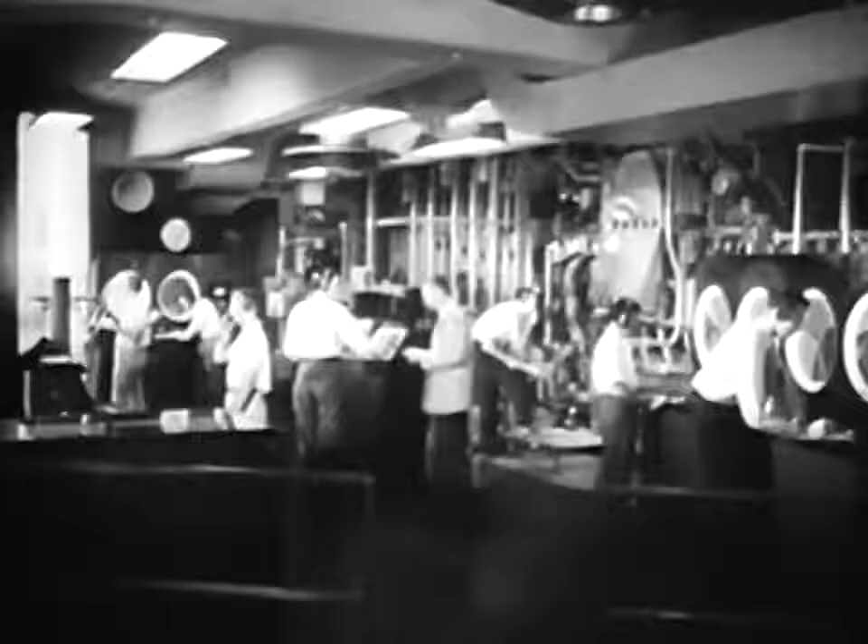Ballistics is an increasingly important and complex science that deals with the technical problems involved in hitting a given target in the field and getting the desired tactical results.

Sometimes the ammunition we need to do a particular job can be carried to the target or placed in the target's path. Sometimes it can be dropped on the target. But in most cases, it has to be fired or propelled.

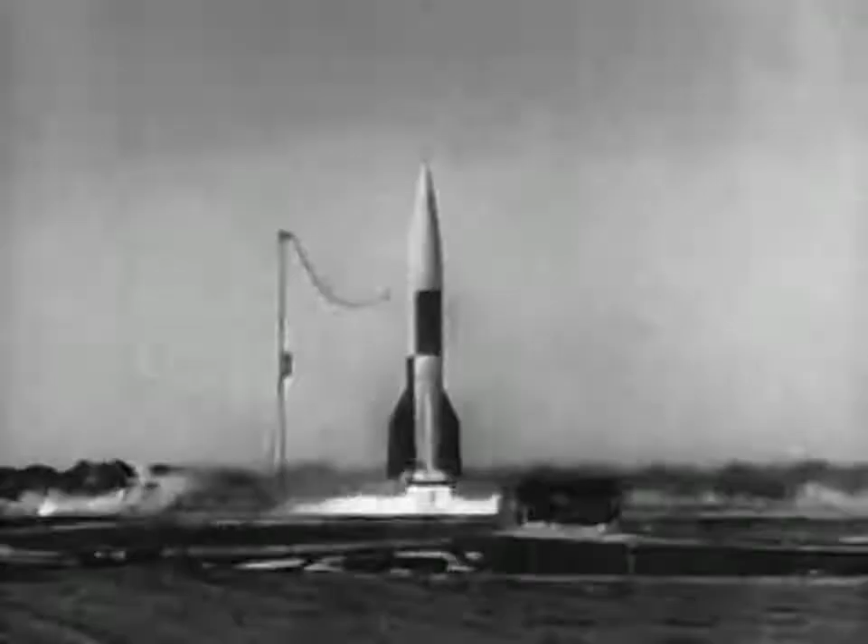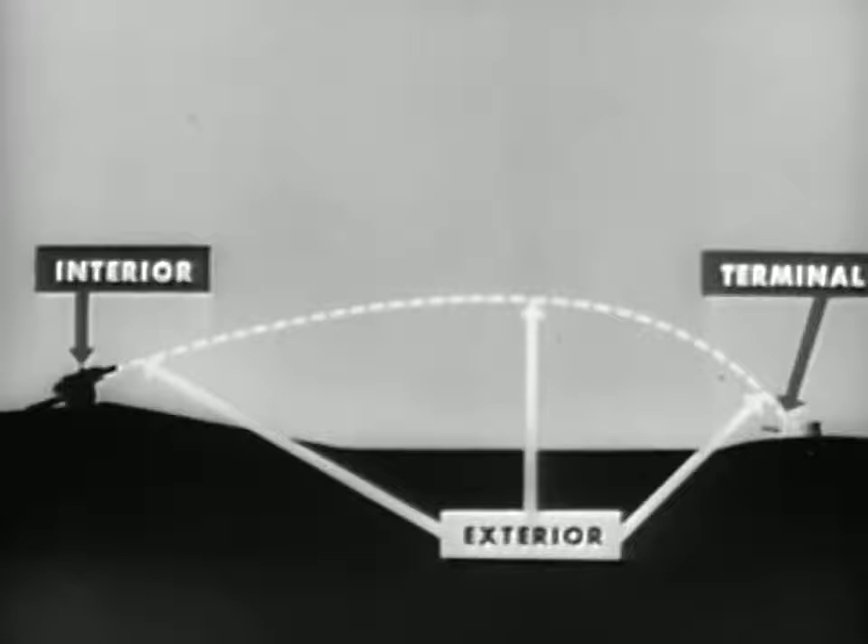This involves the solution of three different kinds of problems, covered by three closely related divisions of ballistics. Interior ballistics is concerned with the launching of the ammunition. Exterior ballistics is concerned with its behavior in flight. And terminal ballistics deals with the action of the ammunition at the target.

Let's look first at the problems involved in launching our ammunition with launching devices that are complex, precision-made instruments, but which operate on a principle as simple as that employed in a pea shooter. When the pressure behind the projectile becomes strong enough, the projectile will move.

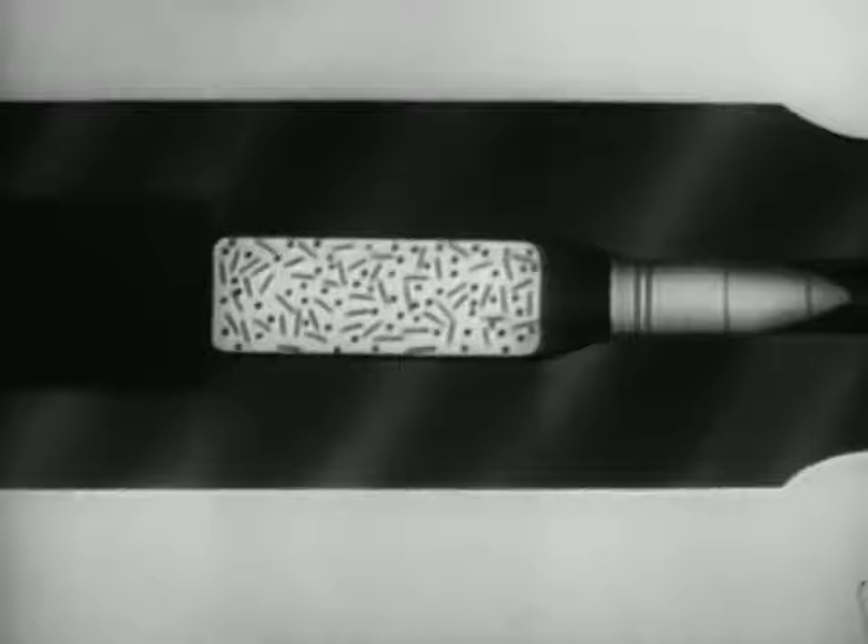In any gun, howitzer, mortar, or small arms weapon, the pressure behind the projectile is caused by the burning of the propelling charge or propellant, which forms a tremendous amount of gas in the chamber. This pressure is measured in thousands of pounds per square inch and is exerted equally on all surrounding surfaces, but with different results.

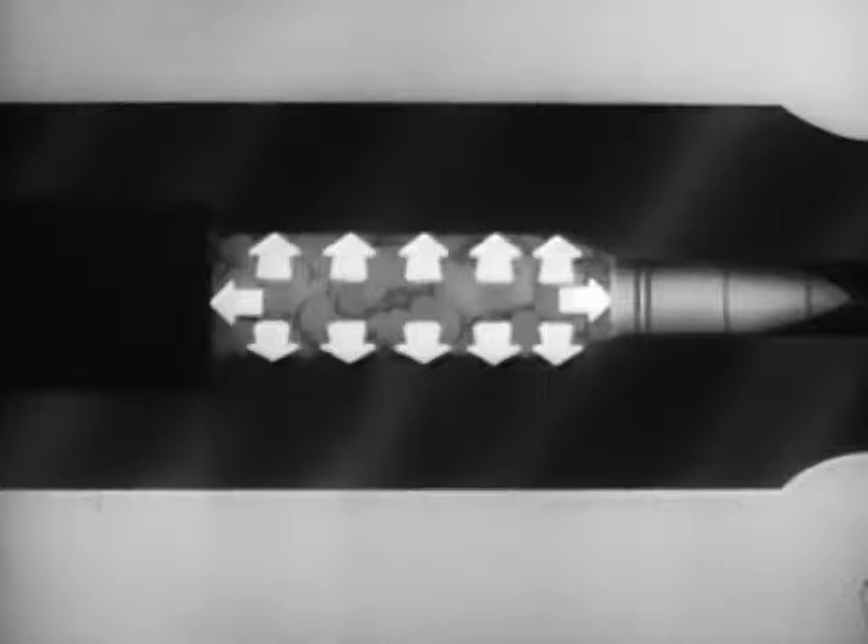The forces represented by the vertical arrows have no effect on the projectile. The pressure or force to the right is against the projectile, the most readily movable of the surrounding surfaces, and sends it out of the bore. At the same time, the force to the left is against the gun, which moves in recoil.

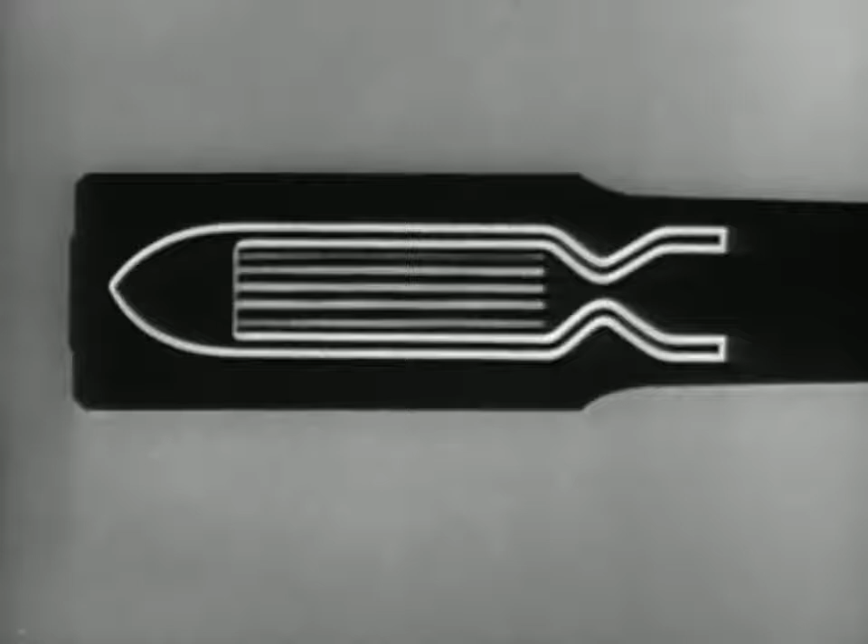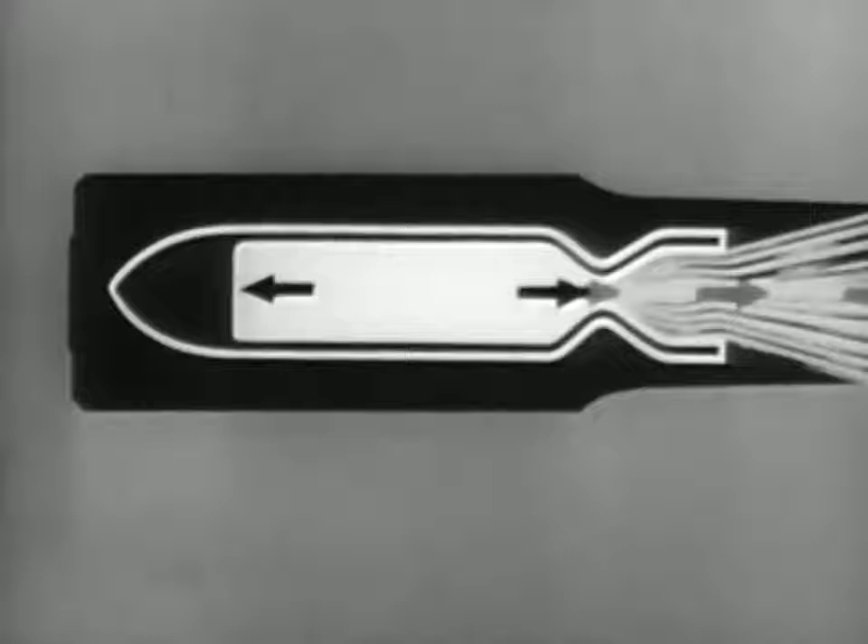By making a few changes in our simplified gun, we can see what happens when we launch a rocket. In effect, the lightweight rocket replaces the gun, and the lightweight gas replaces the projectile. The pressure inside, being equal in all directions, forces the gas out of the chamber at an extremely high velocity. At the same time, the pressure exerts an equal force to the left to propel the rocket.

Military rockets operate on exactly the same principle as the 4th of July variety. The bazooka also uses the rocket principle, while the recoilless rifle is a combination gun and rocket.

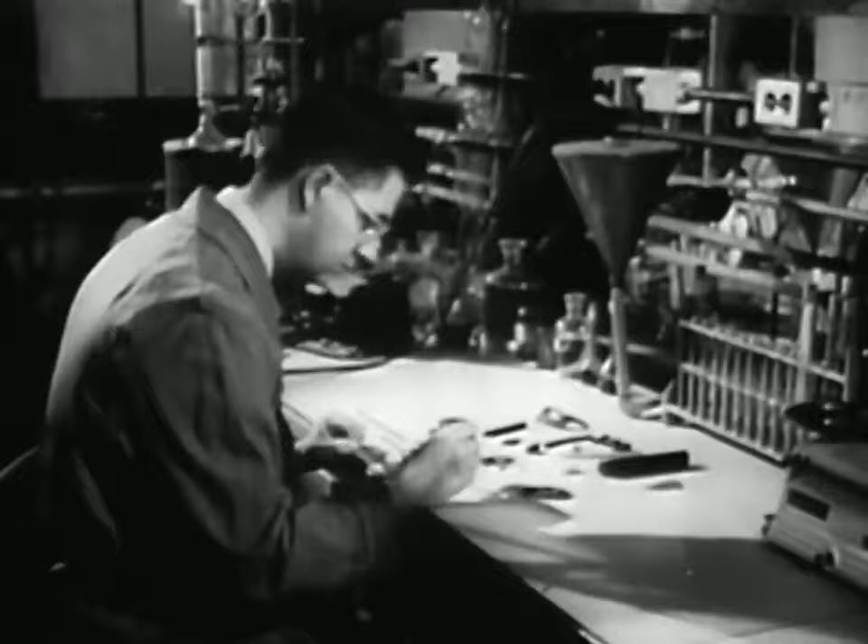The propellant used in guns and most rockets is some form of nitrocellulose, commonly called powder. Modern powder is made in grains, the grains taking many different forms to get the various pressures needed in the many different modern weapons.

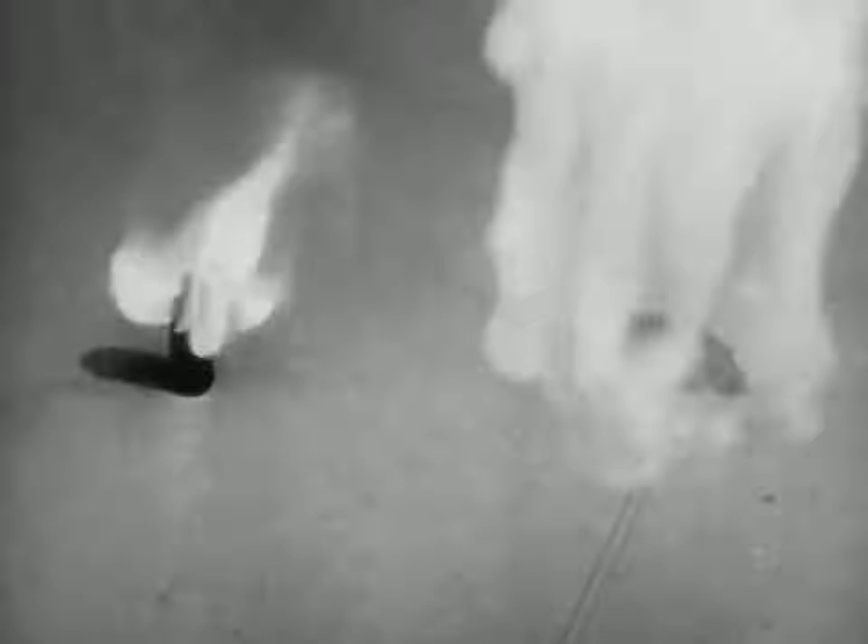Apart from chemical composition, grain size is the most important single factor in determining how rapidly a powder charge will burn. Just as wood shavings will burn more rapidly than the same weight of logs because there's more burning surface exposed, so will small grains burn more rapidly than a large grain of the same weight.

When small, rapidly burning grains are used, the propelling effect is that of a sharp, sudden thrust. The effect we get from large grains is that of a sustained push.

But grain design also affects the rate of burning. In general, there are three types of grain: a large grain with 7 holes, a medium-sized grain with 1 hole, and a small solid grain called a degressive grain.

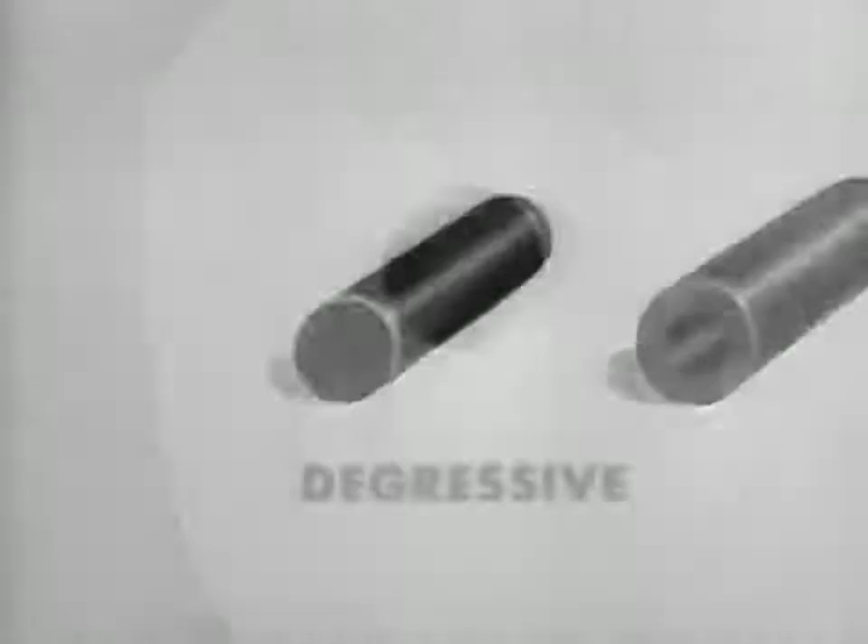When ignited inside a gun, it burns fast and the pressure rises rapidly. As the burning surface decreases, pressure is generated at a slower rate.

Here's a graph to show pressure action during burning. The degressive grain produces a very high pressure quickly, but the movement of the projectile tends to let the pressure drop off rapidly. The medium-sized grain with a single hole is called a neutral grain.

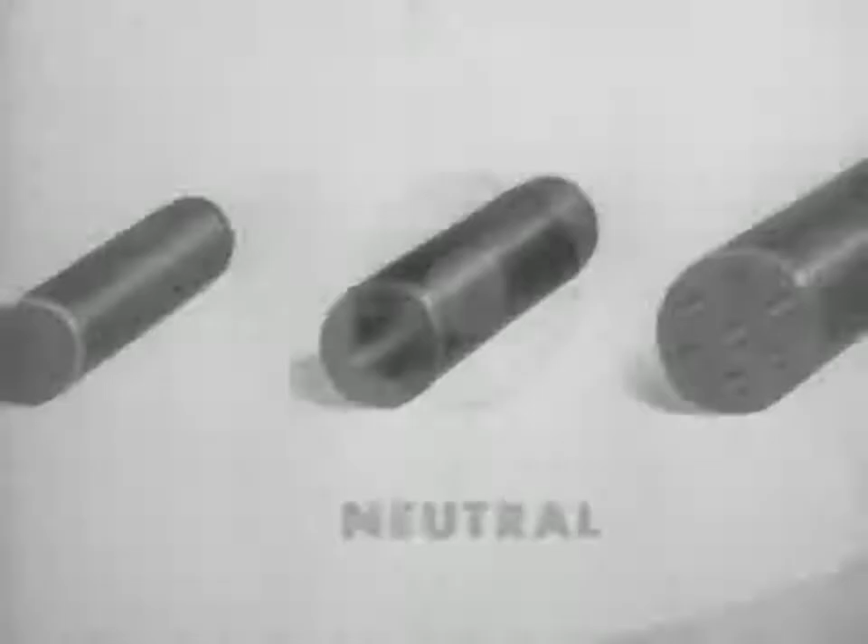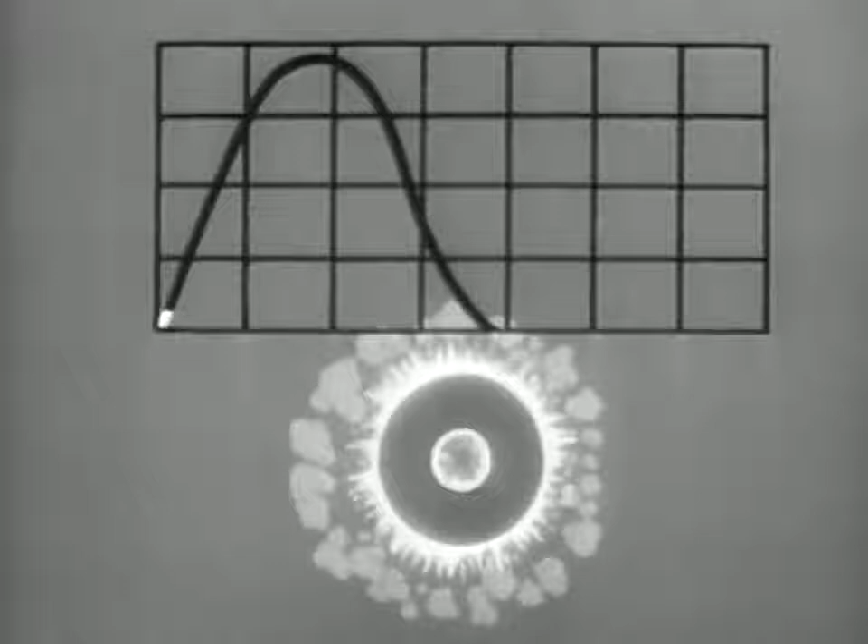In this form of grain, the burning is slower at first, but the burning surface remains constant during the burning period. Thus, the maximum pressure is not as high as with the degressive type, nor does the pressure drop off as sharply when the projectile moves.

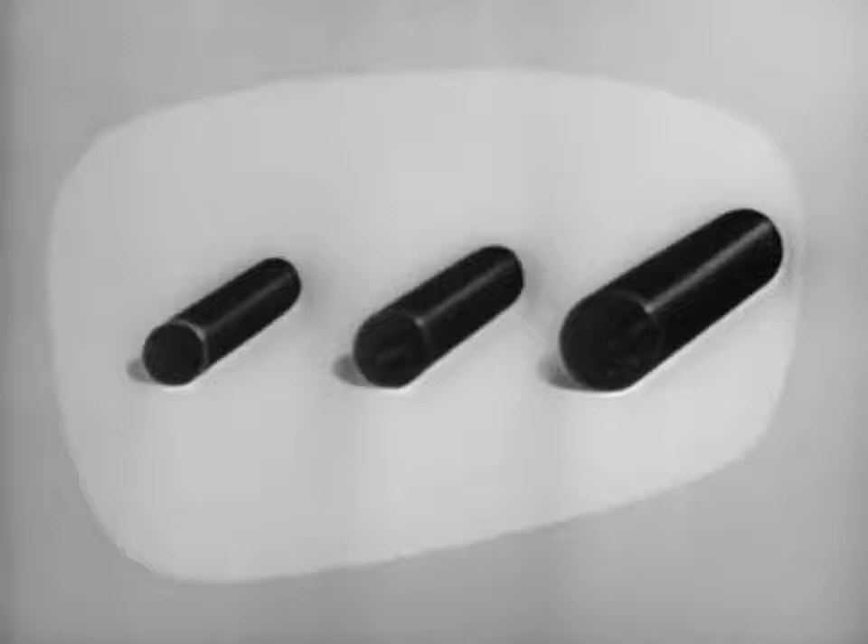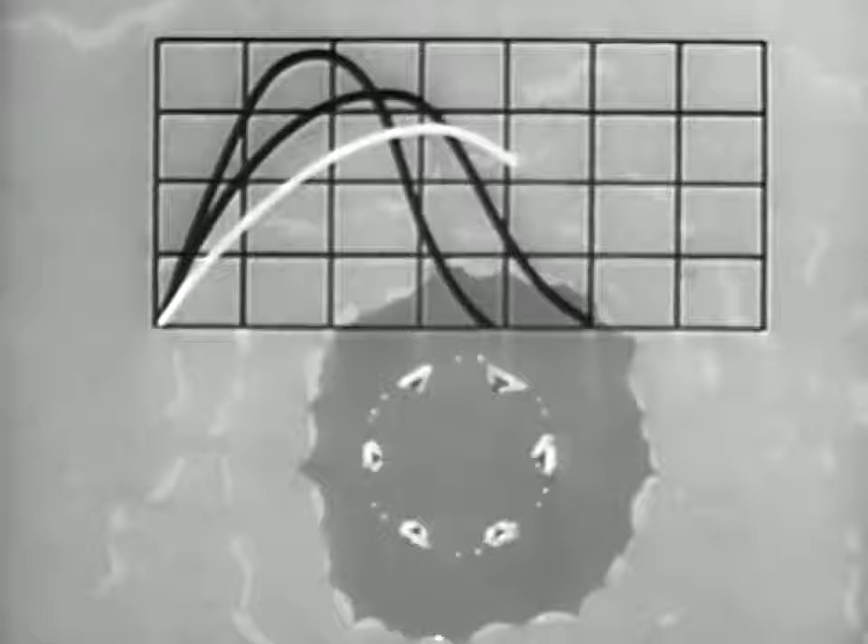The large grain with the 7 lengthwise holes is called a progressive grain. Here, the burning surface increases due to the number of holes. The pressure produced is not as high as with the others, but it falls off even less rapidly as the projectile moves. This grain is preferred in modern high-velocity weapons because it gives the projectile a steady push, produces higher muzzle velocities, and has a lower maximum pressure than is possible with other types of grains.

There are many other grain designs, the fast-burning powder sheets for mortars, for example.

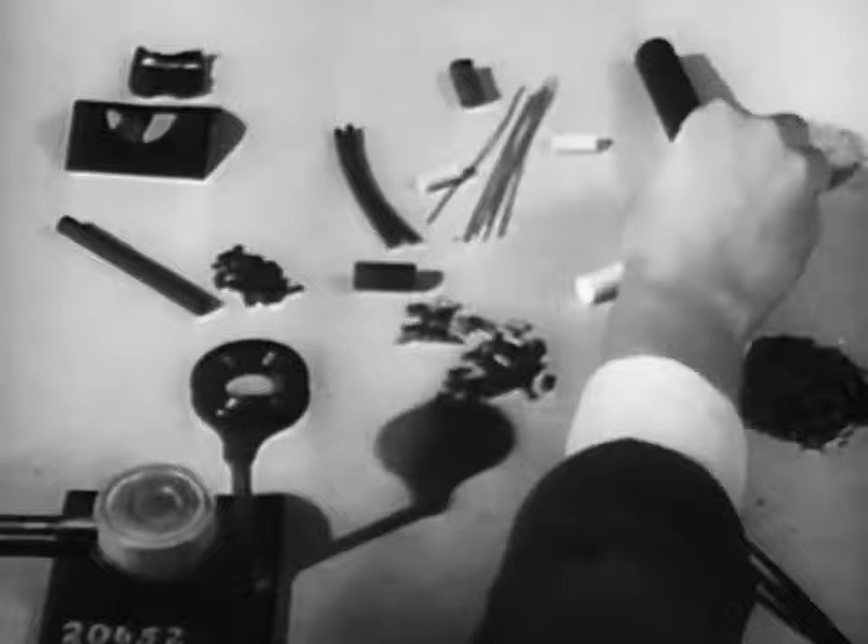Neutral tube-shaped grains are used for certain types of rockets, as well as a variety of other kinds, each designed to provide the particular burning characteristics best suited to the weapon concerned.

Now let's see what kind of pressure action we need for different guns. When we burn a suitable charge of progressive grains, the pressure is moderate and sustained, sending the projectile out of the bore with a continuous push. This kind of pressure action is just what we need to get high velocity in long-barreled artillery.

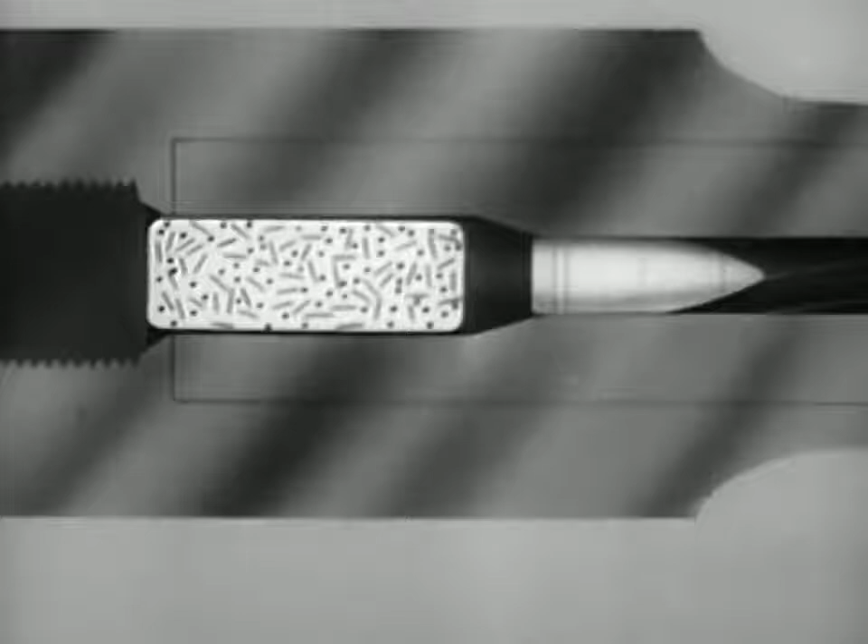But now we'll see what happens when we use the same charge in a short-barreled weapon. There's considerable muzzle flash, and the powder continues burning even after the projectile has left the bore, indicating that energy is being wasted. For a short-barreled weapon, a small degressive grain should be used. This builds up maximum pressure quickly to accelerate the projectile in a short space without undue burning afterward.

This kind of pressure action is just what we want for low-velocity weapons, such as mortars or pistols. But if we use degressive grains in a long-barreled gun, there's a chance that the higher maximum pressure produced will blow it up.

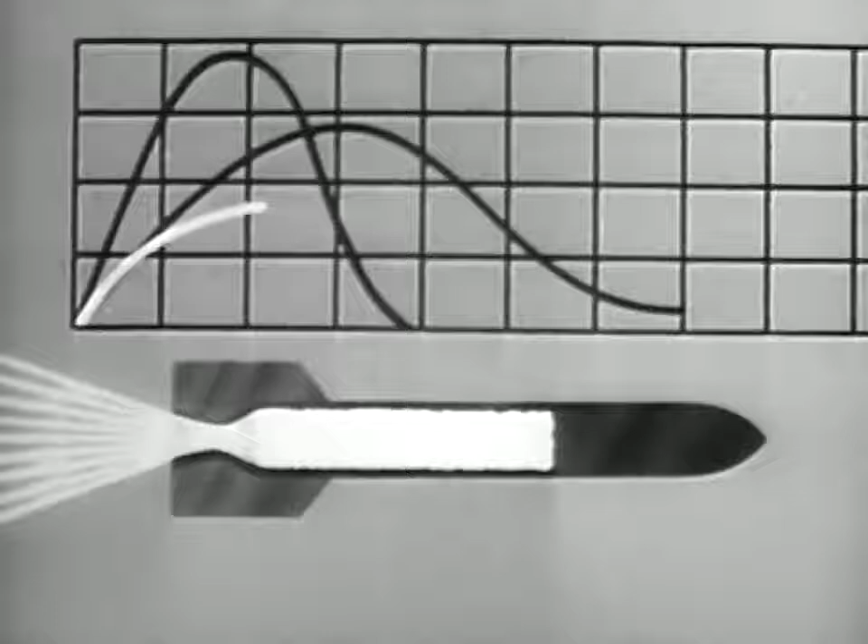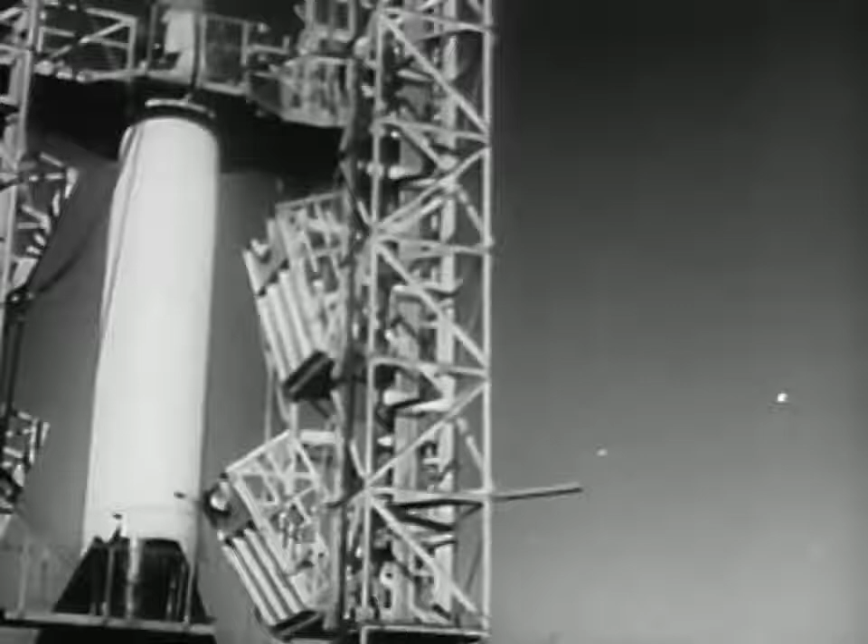For a rocket, we need a low, steady pressure, so we use a special neutral grain. The low pressure will not burst the lightweight rocket, yet give smooth acceleration. For the V2 and other large rockets, it's better to use certain liquid propellants, mixing them at a constant rate to assure constant burning.

In all cases, the propellant must suit a particular tactical purpose. That means providing the desired velocity with a minimum of smoke, flash, and wear on the weapon.

Interior ballistics is a highly complicated science, and what you've seen isn't the whole story by any means. But you do know what an important part pressure plays in launching the projectiles. You know something of the effects of grain size and design on gas pressure, and the relative burning action of the degressive and other types of grain. In other words, you've got a good idea of why and how a projectile leaves home.

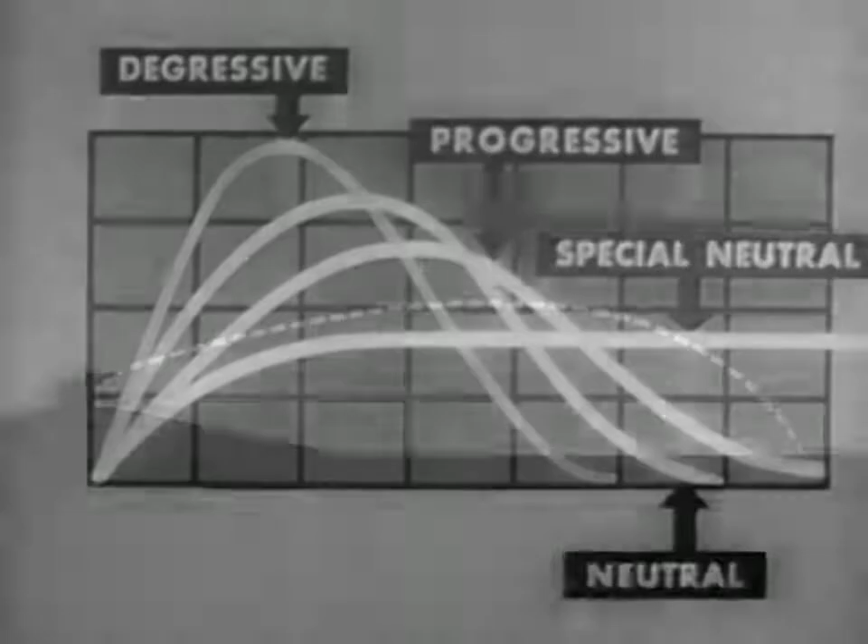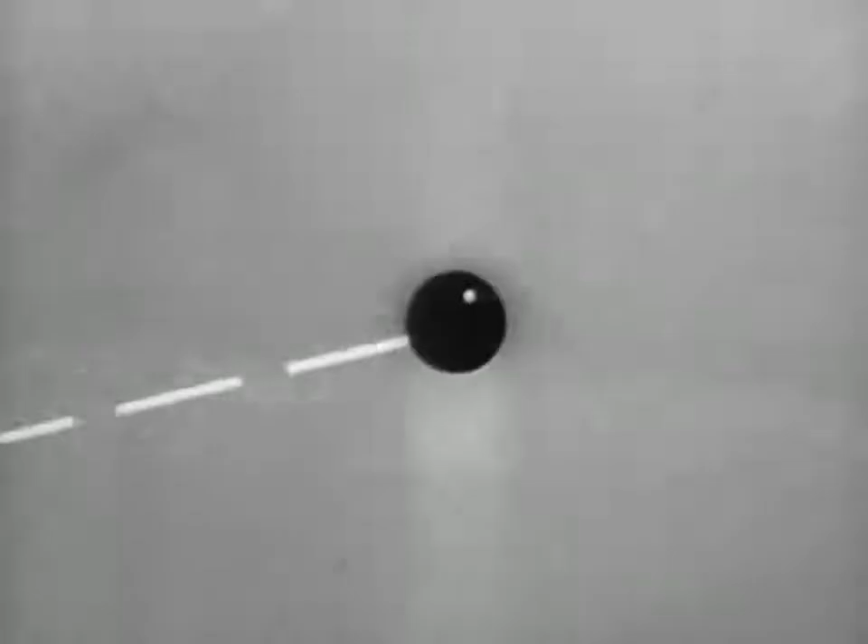Now you're ready to consider exterior ballistics. Exterior ballistics is concerned with the behavior of projectiles in flight. If we could fire a cannonball, influenced by no outside forces, it would continue forever in its original direction at its original velocity. If we add the force of gravity, the cannonball follows this sort of path or trajectory. By adding air resistance, we get this result, and the range is shortened still more.

To overcome air resistance and get greater range, we might streamline our cannonball, stretching it into a projectile. But look what happens - our projectile tumbles, and the range is shorter than ever. We need something to stabilize our projectile in flight.

One solution is to equip the projectile with fins. The use of fins solves the problem very effectively for mortars and some types of rockets, and the result is much greater range. Having the projectile spin is another solution to the tumbling problem.

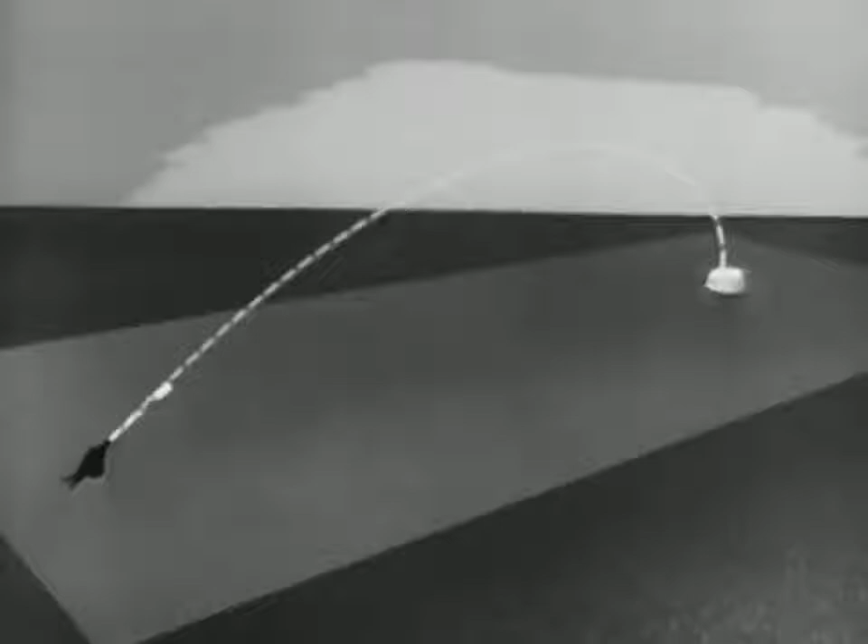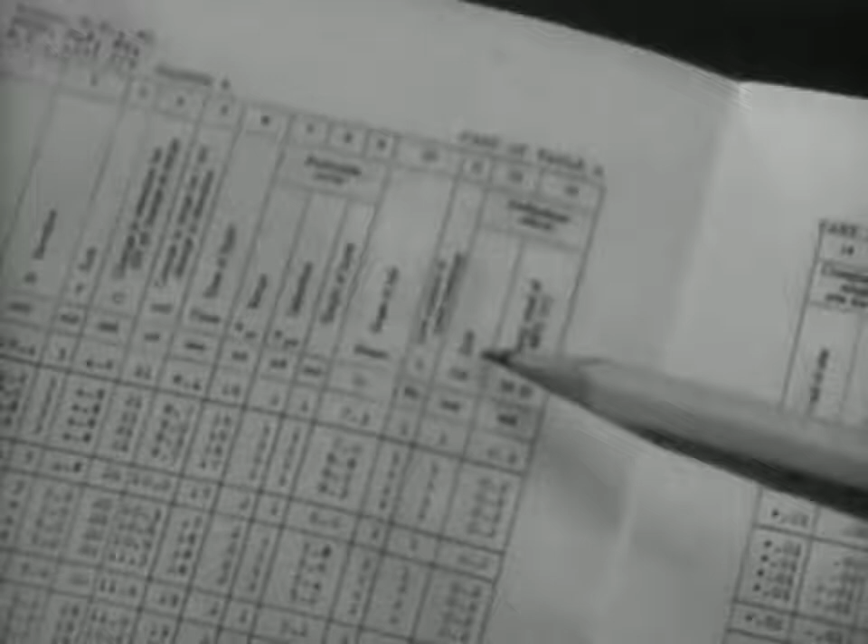This, however, causes the projectile to swerve from a straight course, drifting to one side according to the direction of the spin. That isn't as bad as it might seem because we know it's going to happen, and we allow for the drift in aiming.

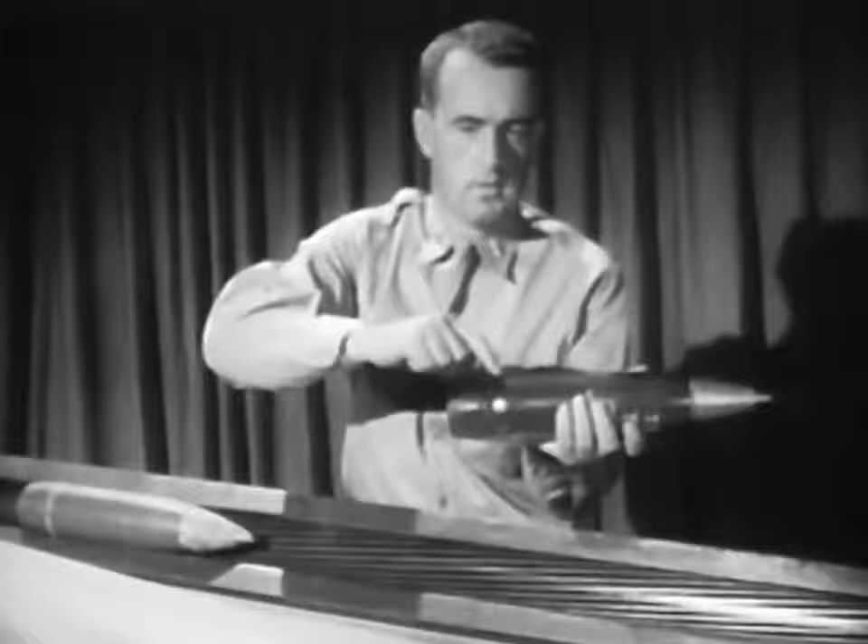To get the required spin, spiral grooves are cut in the bore of the gun and a soft rotating band put around the projectile. The band engages the grooves and the projectile rotates or spins.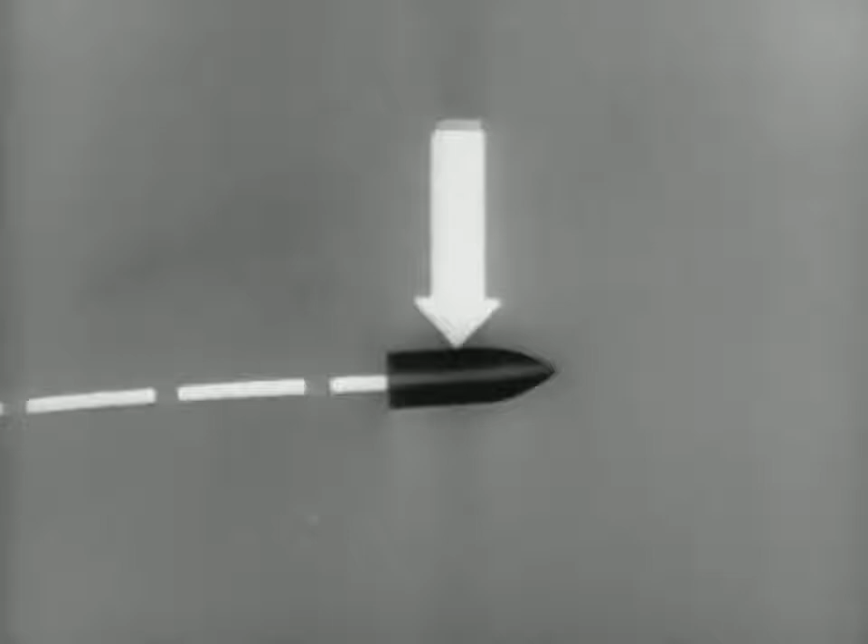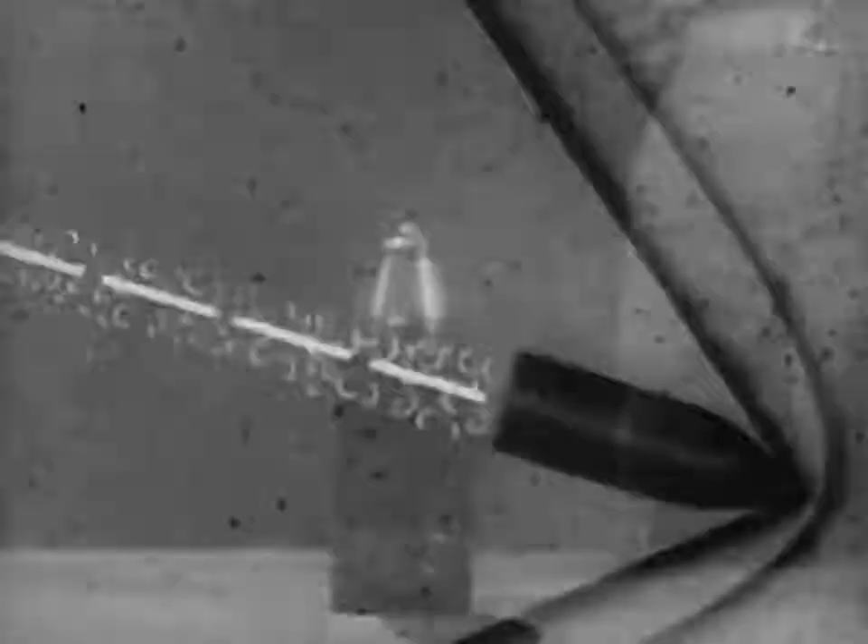Although there are many forces affecting the projectile, the most important to remember are gravity, which pulls the projectile down, and drag due to air resistance, which slows the projectile. There's nothing we can do about gravity, but we can overcome the effects of drag to some extent in the design of our projectiles - for instance, by the streamlined windshield on this one.

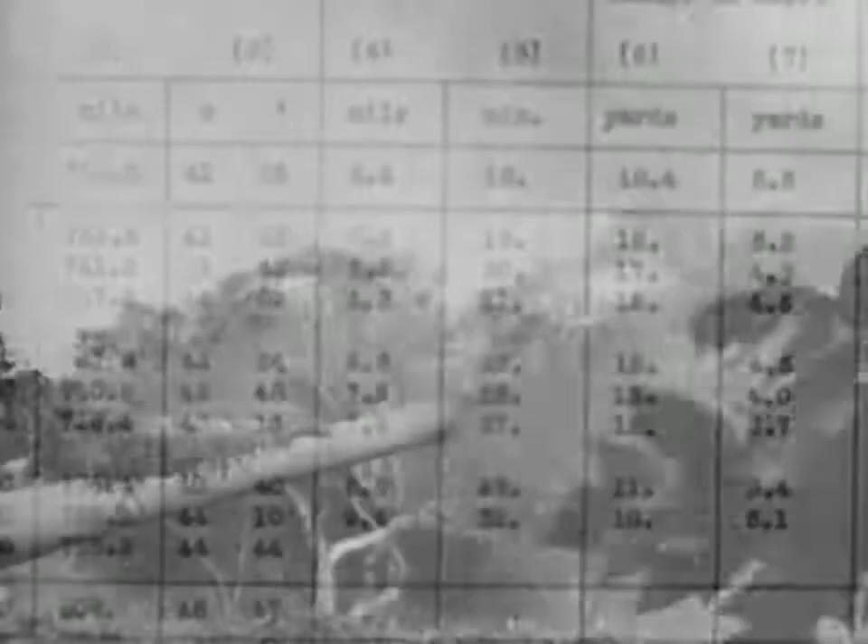Boat tailing, another method of streamlining, also helps to reduce drag. For long-range fire, we must consider, in addition to gravity and drag, the effects of varying density of the air, the temperature of the air, winds over the trajectory, and the rotation of the Earth.

The basic problem of the exterior ballistician is always the same: to study, improve, and predict the behavior of projectiles or missiles in flight.

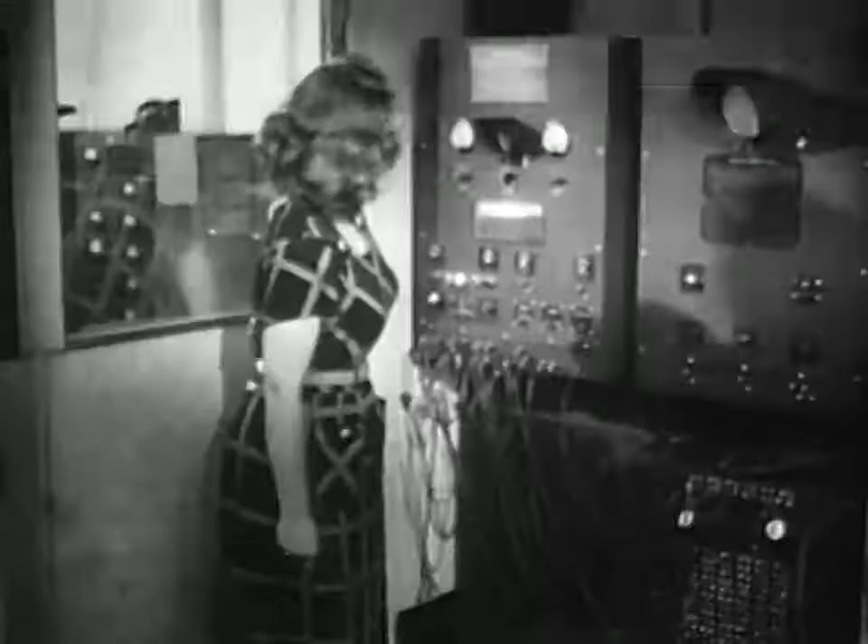Solution of the problem involves the knowledge of many complex forces, the application of many scientific principles, the use of many ingenious lightning-fast computing machines. The ultimate purpose of all this is to design projectiles and compute firing tables, both of such accuracy that our combat units get the maximum number of direct hits.

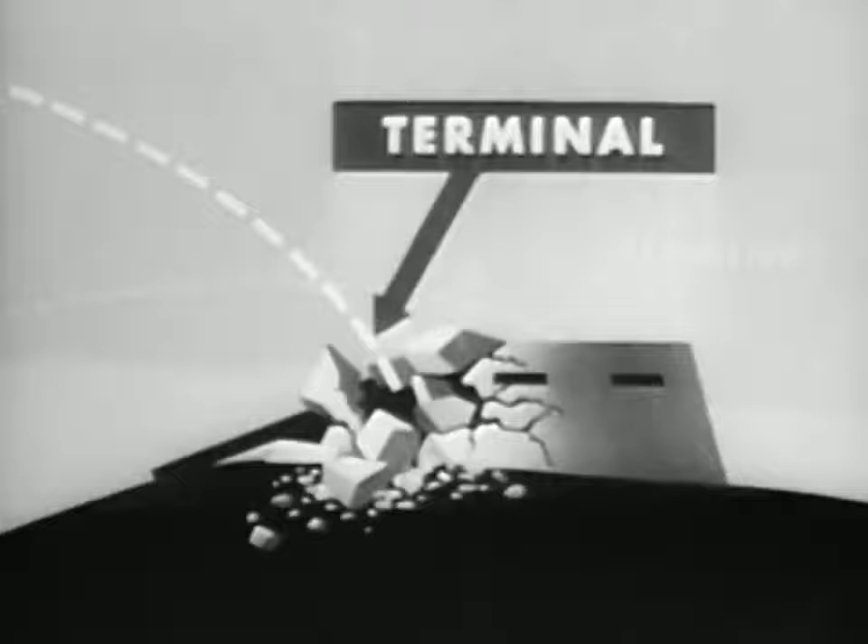And that is where terminal ballistics comes in. In terminal ballistics, we are concerned with what happens at the target, with the problem of getting the type of action we want for each different kind of target by the most economical, practicable means.

Our projectiles, bombs, warheads, mines, grenades, and so forth are designed to provide different basic effects. By using a large amount of high explosive, we get an effect called blast, making use of violently expanding gases under tremendous pressure. Blast shatters brittle masonry or concrete. It will also twist and tear the metal construction of buildings and vehicles.

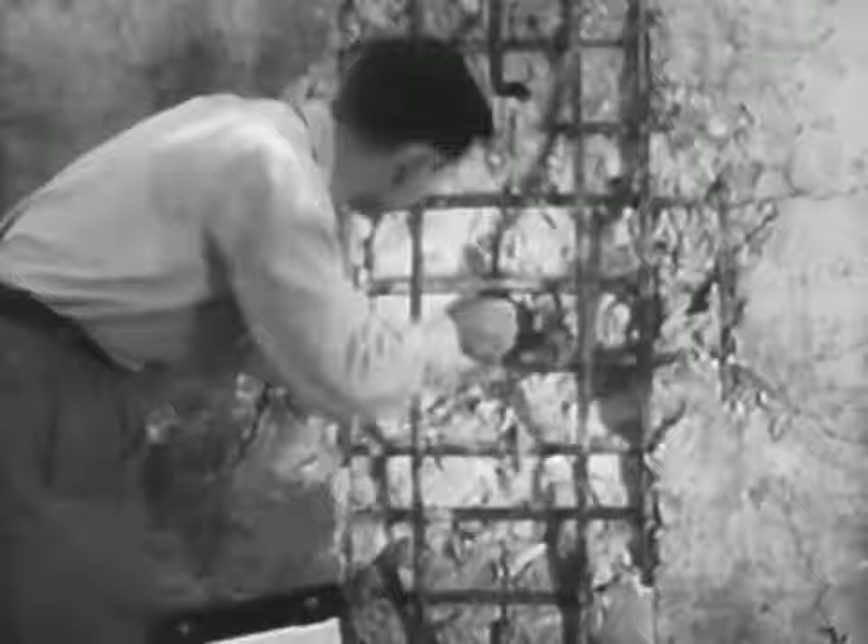If penetration is the important thing, we can use a high-velocity projectile with a tough nose and little or no explosive. This sort of projectile will penetrate wood, stone, and up to several inches of steel.

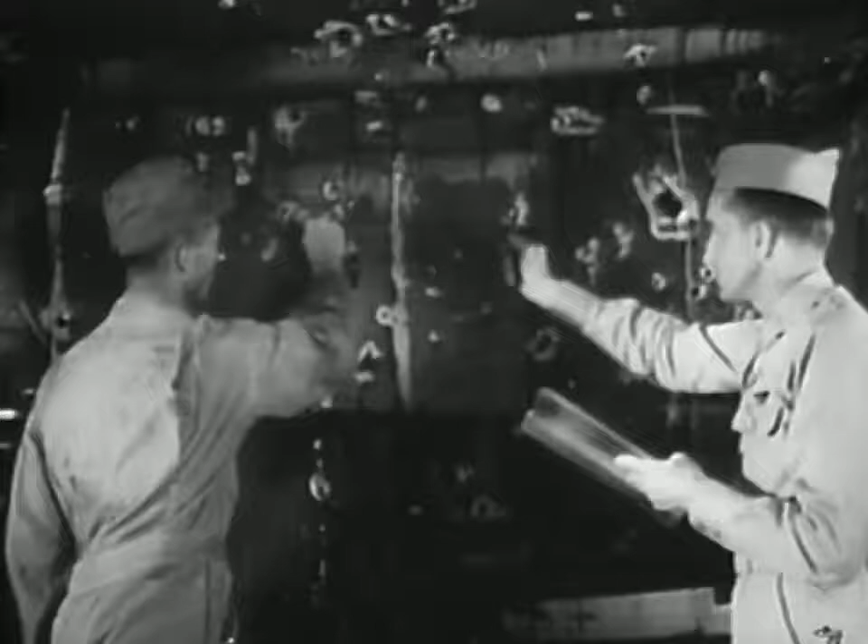By using certain proportions between the weight of the explosive and the thickness of the projectile, we can get fragmentation. Our projectile or bomb breaks up into hundreds of flying fragments. They penetrate like bullets, but leave more jagged, irregular holes. Fragments from bursting shells can do severe damage to personnel and to light structures, such as this plane.

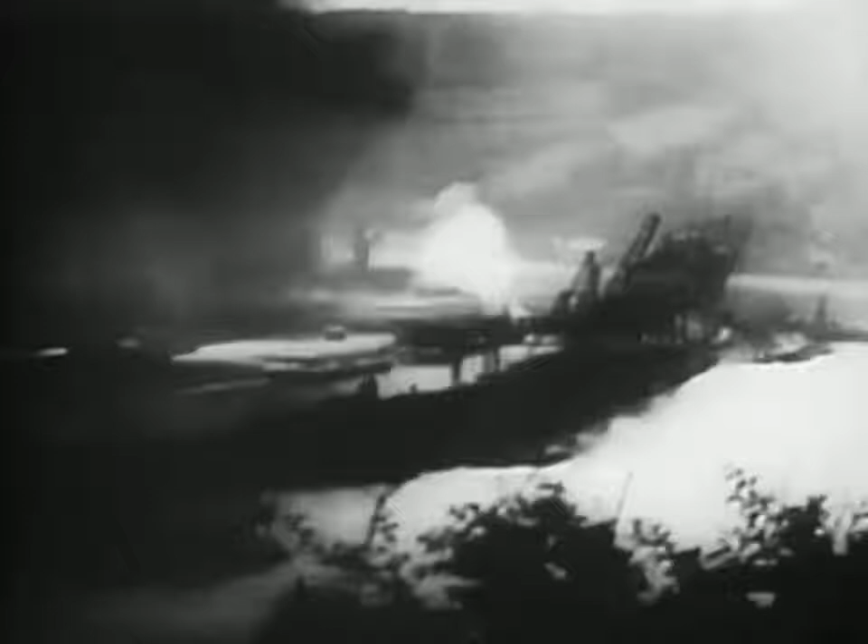Finally, by using incendiary projectiles, or bomb clusters, we can start fires to cause great damage in a city, or in a structure or area where large quantities of supplies are stored.

Generally speaking, each type of action will be effective against one particular type of target, but a combination will be even more effective. So our projectiles and bombs are usually designed with such a combination in mind.

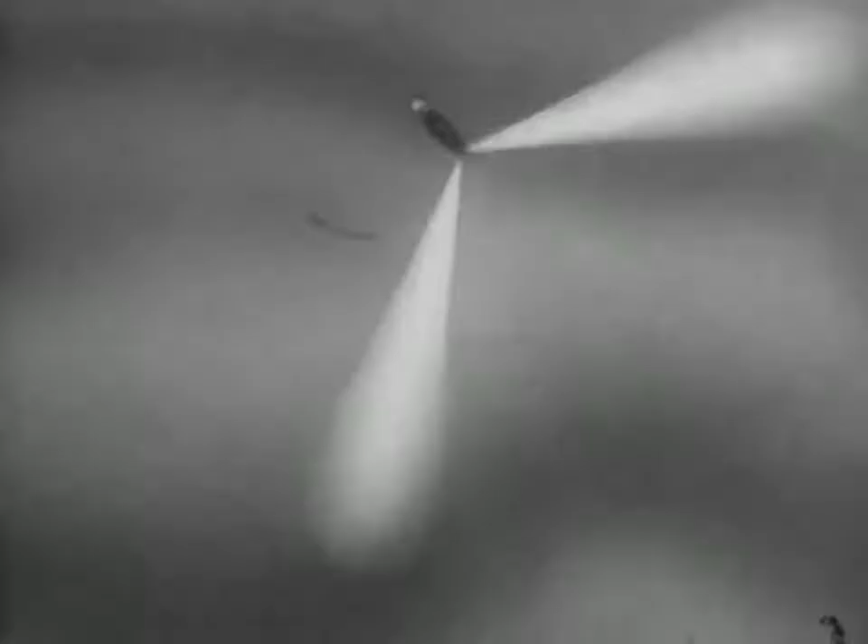Now, to time or control the action of the projectile at the target, we use different types of fuses. Some of our fuses act on impact, either instantly or after a short delay. Time fuses act a set time after launching. Proximity fuses act when they get near the target.

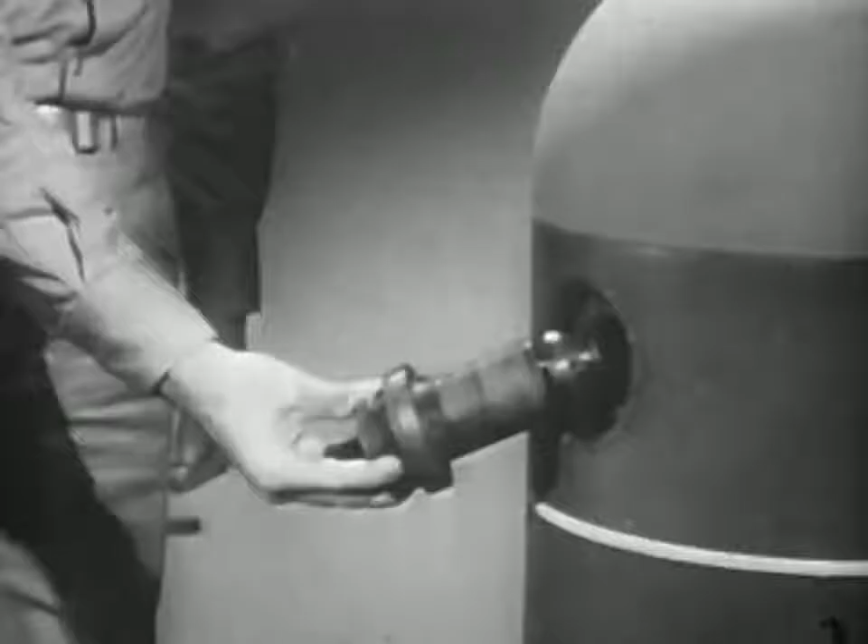Fuse location is also important. In certain cases, we'll get the best results by placing the fuse at the front end of the projectile. In other cases, it works better in the base. Bomb fuses are sometimes placed on the side, and in the larger bombs, more than one fuse is necessary.

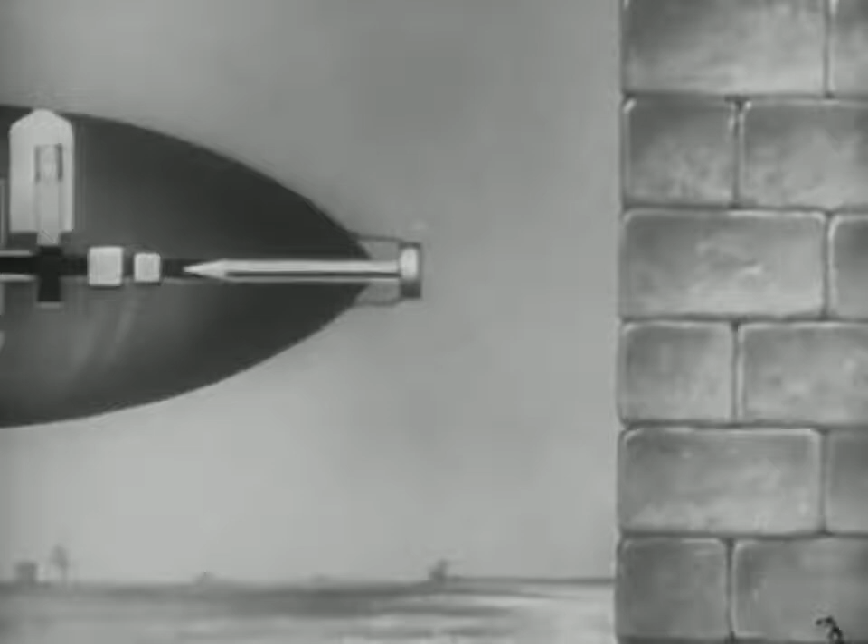The fuse type and fuse location determine to a large extent the type of action we get at the target. Now let's consider a typical application of these fundamentals of terminal ballistics in dealing with an enemy plane. Fragmentation is the effect we want.

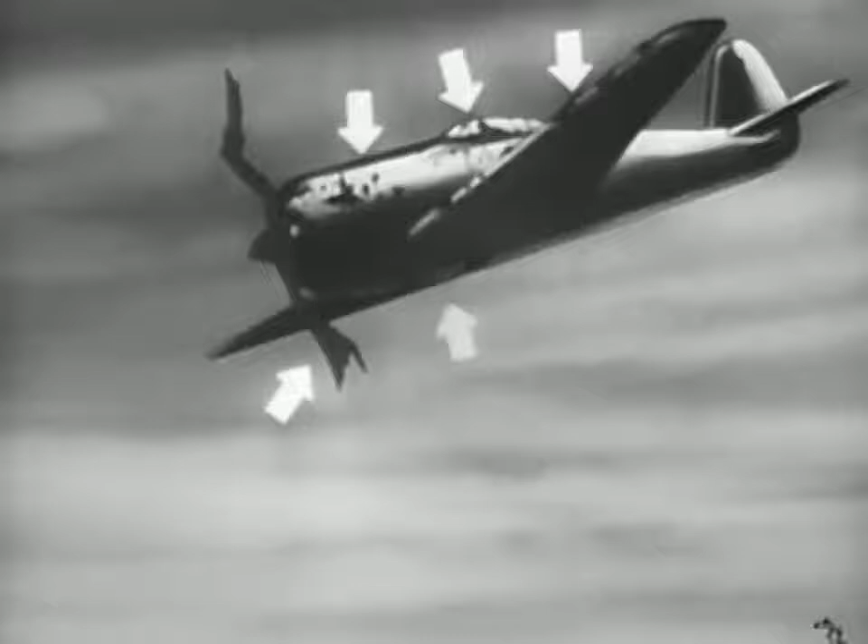Besides endangering personnel in the plane, flying fragments can wreck the engines, weaken structural members, and may penetrate the fuel tanks, generating enough heat to start a fire.

The shell to do this particular job must carry enough high explosive to shatter the shell case and produce high-velocity fragments of the most effective size.

Now, what about the fuse for this job? We might use a time fuse, but our best bet will be a fuse of the proximity type, one that will go off automatically when it's near the target.

If we're dealing with an armored target or one of reinforced concrete, the first problem is to penetrate. So we need a tough-nosed, armor-piercing projectile that will be strong enough to withstand impact, one that will penetrate without breaking up.

Fragmentation is effective after penetration, so a small explosive charge is added. In this case, the fuse must be placed in the base of the projectile and should have a short delay action after impact. The combined effect of penetration and fragmentation gets both the pillbox and its occupant.

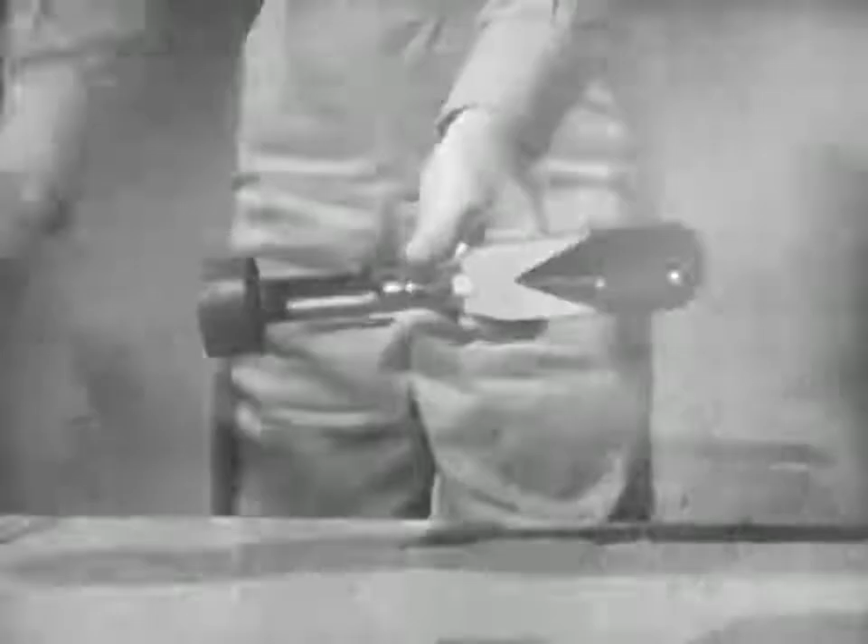If we don't have high velocity, we can get penetration by sharply focusing the force of the explosion. This is done by the proper shaping of the high explosive charge.

It's up to the terminal ballistician to determine from his experience and his experiments which combination of effects will be the most destructive for each kind of target.

And there are other elements to be considered by the terminal ballistician. In all cases, the ammunition he prescribes must be suitable for mass production. It must also be safe to handle, transport, and store. Technically, it must present no impossible problems in any phase of ballistics.

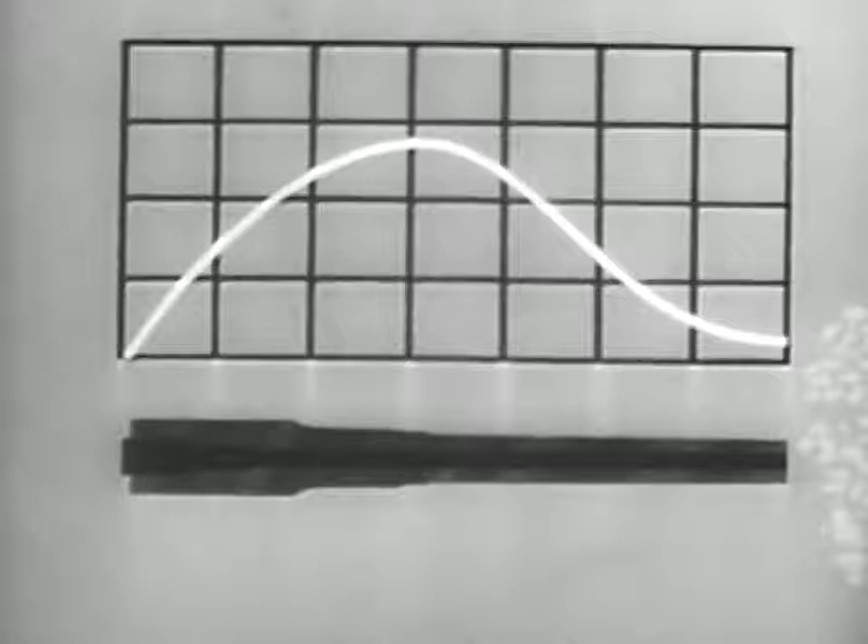The first concern of the interior ballistician is the safe and successful launching of the ammunition. The important point to the exterior ballistician is predicting its behavior in flight. By means of firing tables, this information is passed on to the appropriate using units. They, in turn, must launch the ammunition with full confidence that the terminal ballistician has provided it with the proper destructive potentialities at the target.